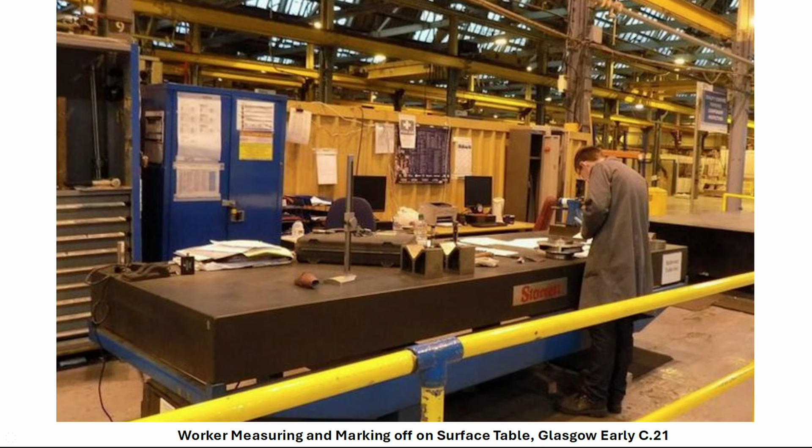And here you can see the same factory 100 years later - again, someone marking off from a surface table. Not quite as tidy as the previous surface table we saw, messier than that one, but nonetheless the same job being carried out here, marking off on a surface table.

Now, unbelievably - and I find this something that might be difficult to credit - if you've got a large surface, this is still the best method, even today, in the 21st century, 2026. Graham T. Smith in Machine Tool Metrology says a surface that's been prepared by scraping is generally considered to be superior in its overall accuracy and flatness to that produced by the manufacturing processes of either precision machining or surface grinding operations.

Although the lapping technique can be equal to or often exceed scraping, this is normally over a small distance. It should also be emphasised yet again that both lapping and grinding operations do not achieve the long distance flatness characteristics of a quality scraping operation. So this process that Whitworth developed in Glasgow in 1840 - creating flat surfaces through a 3-plate system of scraping - is, unbelievably, still one of the best methods for achieving a flat surface over a distance.

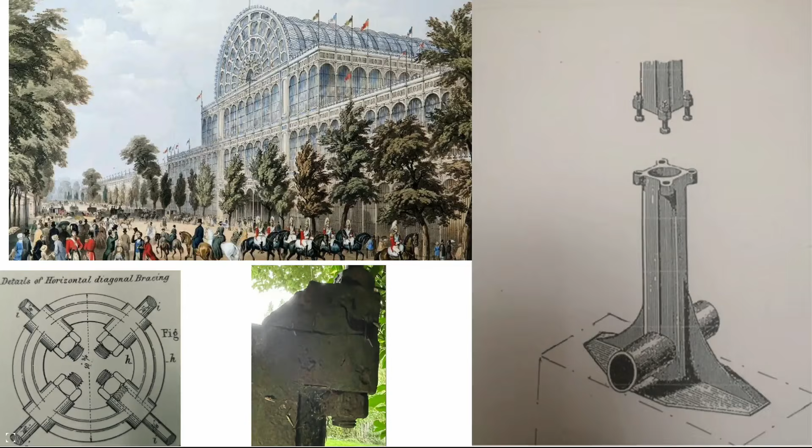This is the work I was privileged to do alongside Ken Kiss, who was curator at the Crystal Palace Museum. I want to move on to Whitworth's second paper on screw threads and a problem: how was the Crystal Palace, built in 1851, built in only 190 days, using, as Ken calculated, around 30,000 nuts and bolts, when there was no standardised thread form until 1905? How was it possible to build it that quickly when there was no thread form?

You can see here pictures of some of these - well, there's a column here, and these are taken from the drawings of the Crystal Palace. What's interesting to note is that, if this was a modern engineering drawing, you'd see the thread form specified.

Instead, they've only specified that the bolt diameter is 7/8. They've not specified anything to do with the thread form, because there isn't one. There isn't an established one to specify.

So I've poured through the engineering drawings for the Crystal Palace. You can find them in various places, like the Dana Library at the Science Museum. The Saffron Walden Gibson Library actually holds them in full as well. I've poured over them - that's near Cambridge.

There's no standard set there at all, so I'm going to talk about this. In this part of the talk, I'm going to discuss how I tackled this. Through Ken, I managed to access original nuts and bolts from the Palace. Using the technology available in the period, the screw cutting lathe, only available from about 1800, I remade the bolts, establishing that a vernacular workshop practice was in use by industry long before there was one sanctioned by the state.

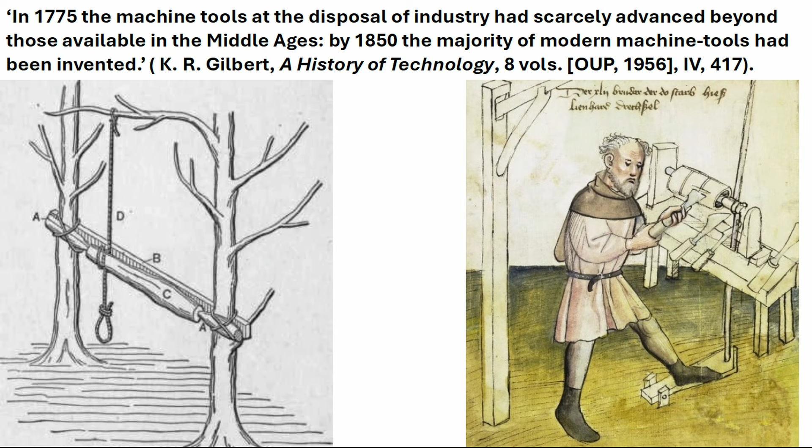You can see it here, again a pole lathe, slightly more advanced, being used in the medieval period by a worker. Note there's no tool rest at all, but the foot is working the pole, working the driver for the turned piece.

If you visit Chartres Cathedral and you've got sharp eyes, you can look up and see some 13th century stained glass, and you can find a turner there—a woman turner, again on a pole lathe. So this is the technology of that period.

But we have to move forward a little bit. So you can turn on it, but there's no tool rest, and there's no lead screw.

That means you can replicate that gear train. That means that somebody in Bolton, or somebody in Boston, or somebody in Baltimore—it doesn't matter. As long as they replicate that gear train, they can make the same thread as you, the same number of threads per inch. That means you can replicate the threads.

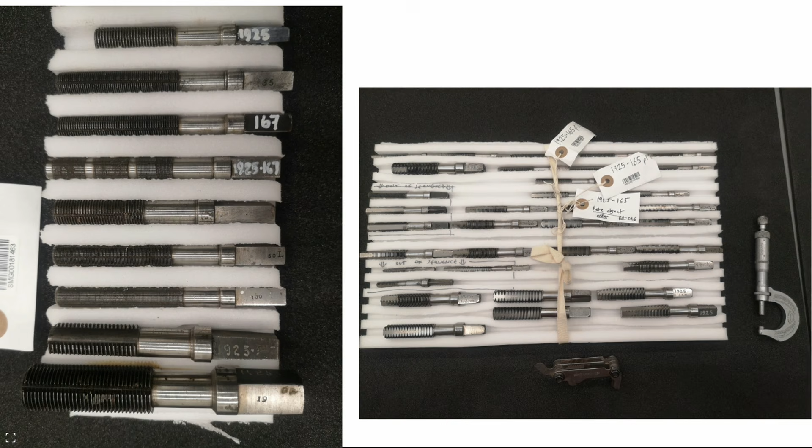I had the privilege of going to the Science Museum archive where I measured some of the taps that Maudslay made, from around 1800. They're remarkable because here you see a new technology being explored for its capabilities. Some of these taps are 100 threads per inch—remarkably fine threads are being produced there.

Even Whitworth's millionth measuring machine only uses 20 threads an inch. You can see that Maudslay is experimenting with very fine threads, must be for measuring equipment, but there's a lot of experimentation going on. The Science Museum began collecting these, as you can see, around about 1925 from the dates of the numbers. A real important part of our industrial heritage, that archive, because these could be produced by Maudslay after the invention of that machine.

I say invention of the machine—it's one of these things where, at the same time, somebody in France was probably working on a lead screw lathe, and somebody in America too. Somehow, without talking to each other, this was in the air. But Maudslay gets the credit.

So, as I said, Whitworth wrote this paper on standards. And he wrote about how there's great inconvenience found to arise from the variety of threads adopted by different manufacturers.

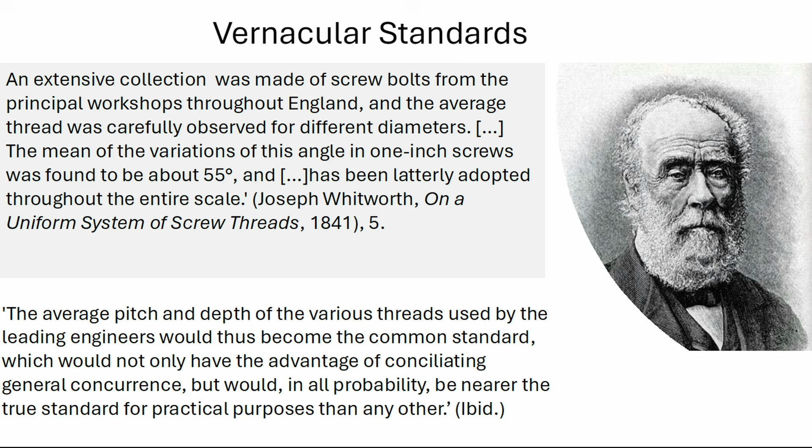Now, Whitworth's method of using vernacular, native workshop practice to ensure the likelihood of his standard being adopted was an approach that Charles Babbage, the inventor of the mechanical calculator, the difference engine, which Whitworth, as well as Byron's daughter Ada Lovelace, worked on, approved of.

And you can see Babbage here. Babbage went to Cambridge University, but nonetheless he saw where innovation was coming from. Babbage says, those who enjoy leisure can scarcely find a more interesting and instructive pursuit than the examination of the workshops of their own country, which contain within them a rich mine of knowledge too generally neglected by the wealthier classes. If you want to find innovation, go to the workshops, not the universities of the time, for engineering innovation. So, as I said, Whitworth aimed for a common standard.

But this standard needed the kind of technology that had been created by Maudslay in 1798, establishing that geared relationship between the turned object, held in a chuck or faceplate, and the cutting tool secured in a tool post, travelling on a lead screw. So let's think of some of the other things made in the period to show how necessary it was.

If you look at the Rocket of 1829, Michael Bailey and John Glithero measured the Rocket. It's been in a museum since 1862. It took until they measured it in 1999 before anything was really established. Nobody had taken the care to do that.

And what they found was that every nut and bolt was different. Even in one machine, every nut and bolt was mated to each other, and none of them would fit any other nut and bolt there, even in that one machine, the Rocket. And that persisted until Whitworth's time.

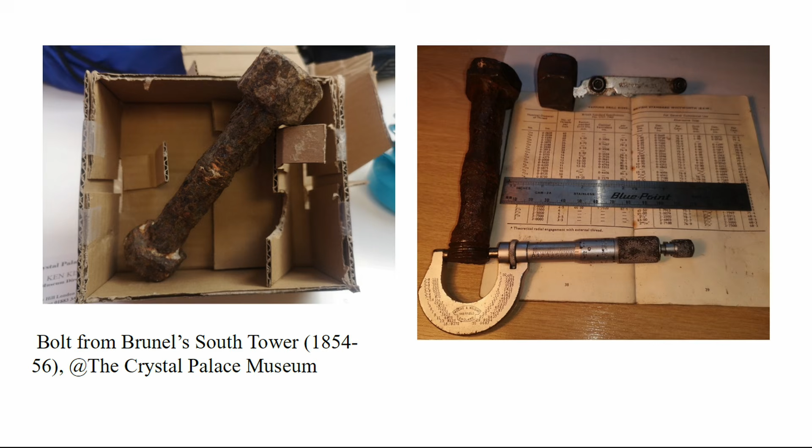So how could I prove that this was the Whitworth standard? I kind of had to make one, as a further test. So what I did is just turned a bit of steel to 7/8, undercut it, hand ground a tool to the 55 degrees, and then followed the Whitworth specification of 1841, which was a 7/8, 0.875 OD, a 0.737 root diameter, and a 55 degree thread rounded at the top and bottom.

So the thread fitted, it fitted the old nut, fitted the bolt, back and forwards. That's the Boxford lathe that I did this work on, an old 60s lathe. Here are some more threads that I measured that Ken had got for me, and you can see here the old nut fitting on the new thread.

And as Fairbairn said, writing in the 1860s, in the present day, to form an ordinary screw thread with any size other than Whitworth standard is little less than a crime in the eyes of educated mechanical engineers. So this is workshop practice, but it's not yet sanctioned by British standards.

So the first meeting of the British Engineering Standards Committee, later the British Standards Institute, fell on the day that the Victorian age ended. That was the 22nd of January 1901, the day that Queen Victoria died. That's the day they met. And they subsequently adopted the British Standard Whitworth screw thread in 1905. That's when it was sanctioned.

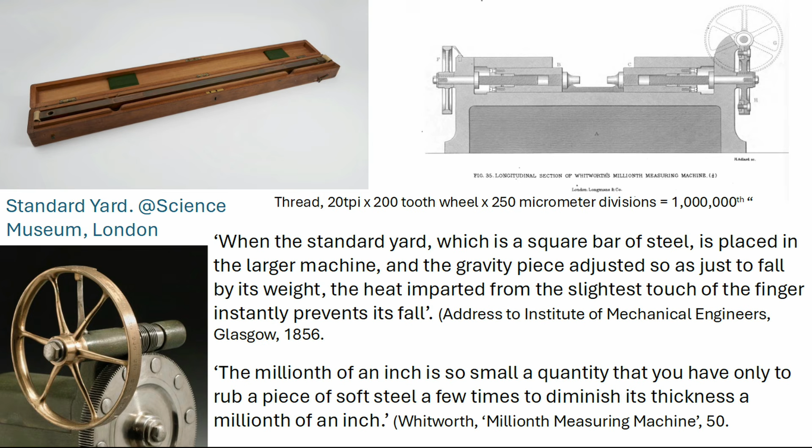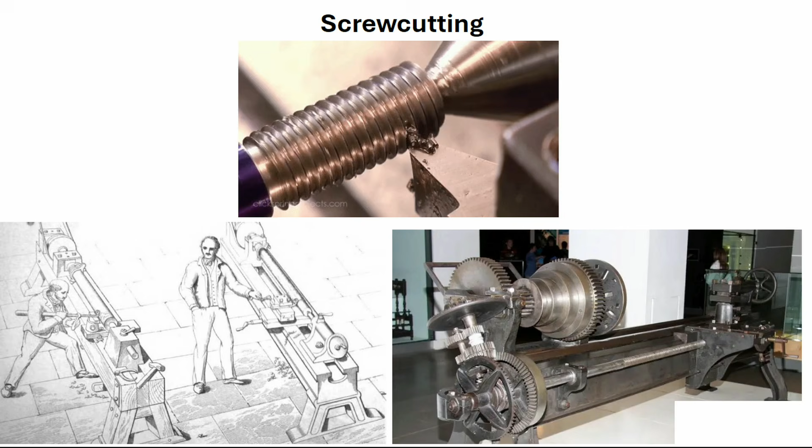In that book I looked up, it said accuracy could be within a nanometre. As I said, that mercury mirror isn't exactly flat because of the curvature of the Earth, but that was still held as the standard in Germany.

I had that in the quote actually, and I cut it. It's in my computer, I could find it and send you the reference. But it was a nanometre, I think over a 50 centimetre length.

Nanometre sounds quite small. Is that micron or tenth micron? It's remarkable, it's remarkable. But I'll be happy to send the reference because I do have it there.

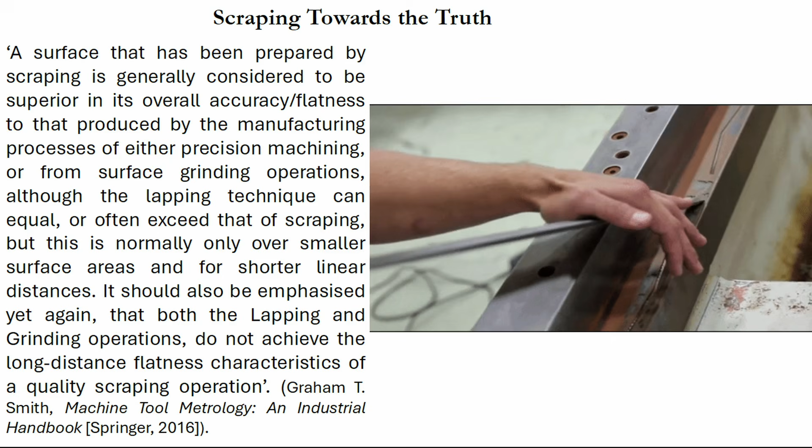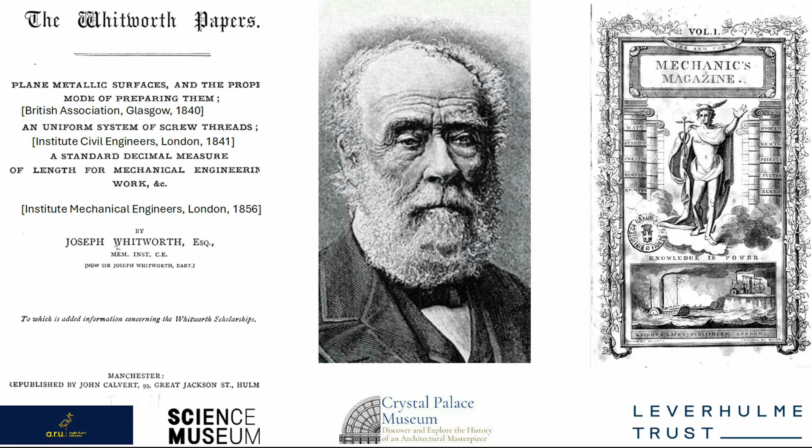I remember one of the courses I did at university was metrology, and you got into trying to measure small things. One exercise was they gave you a surface plate, surface table, and suggested you measured it. Of course, as an undergraduate, the last thing you thought was that this flat table was anything other than flat.

And then you set about finding all these small deviations, and your mind goes slightly bonkers because you're not quite sure what you've just measured off the surface table. But they were very small dimensions even then.

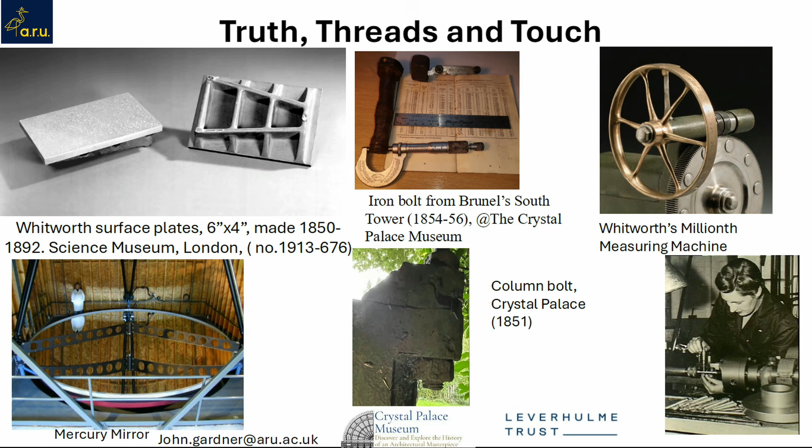With a modern surface table, I guess now you do it with light. One of my colleagues, Sam McMaster, is an expert in tribology and surfaces, and he would definitely know. But I could send you that information if you give me your email at the end.

What Whitworth noticed was that because you end up with this mottled effect on the surface plate, people would fake them. They would just do the mottled effect so it looked perfectly flat, but it was a fake surface plate. So even then, there would be fakery.

But he had that test, of course, where you slide them together and atmospheric pressure keeps them together, or you lower one on top of the other until there's a pocket of air. That will only happen if they've got a really high degree of truth.

But the interchangeability question is the one that comes through all the time, isn't it? You do like your spare parts to fit what you're trying to fit your spare parts to.

The Whitworth thread has become obsolete, I understand. Why is that? It's still used.